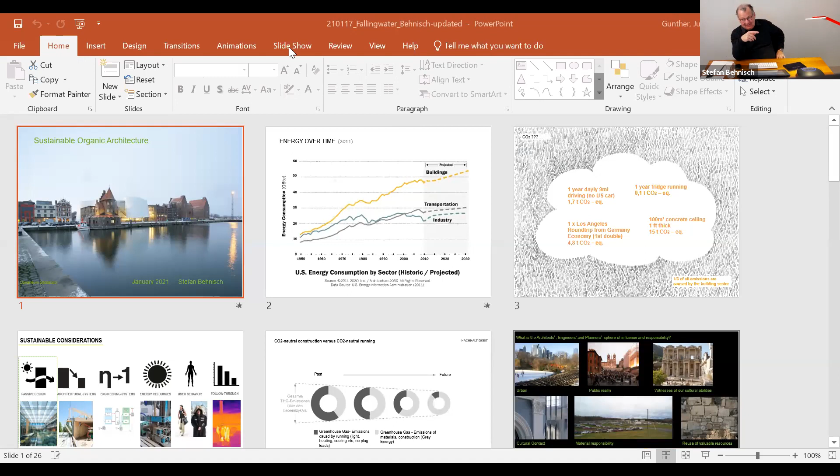I have prepared something. It's not an easy topic for me because the understanding from expressionist architecture here in Europe of organic architecture is a little bit different from the American understanding of organic architecture. But I hope I managed to give some ideas of our mutual understanding here.

I took the liberty to showcase here a non-built building, a building that is right now in design. We just started a few months ago for a well-known client, who asked us to do a CO2 neutral building across its lifespan, including materials and everything—so a real CO2 neutral building. Next, please.

First of all, I would like to remind everybody of the challenges we have here. As we see, our buildings are actually one of the biggest problems we have. Since two-thirds of our building stock is pretty old, it is a challenge for all new buildings to really compensate for that, considering that by 2050 we all want to be CO2 neutral in our cities, and some countries want to achieve that by 2030, which is 10 years from now. Considering that designing and constructing a building takes 5 years, we have to speed up.

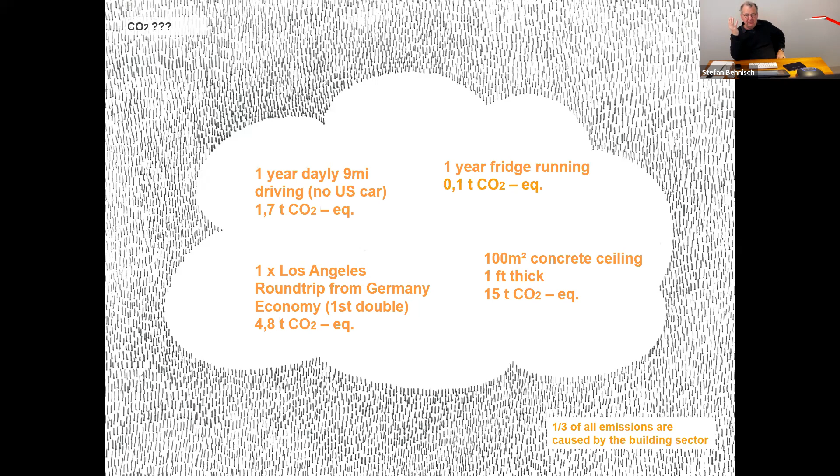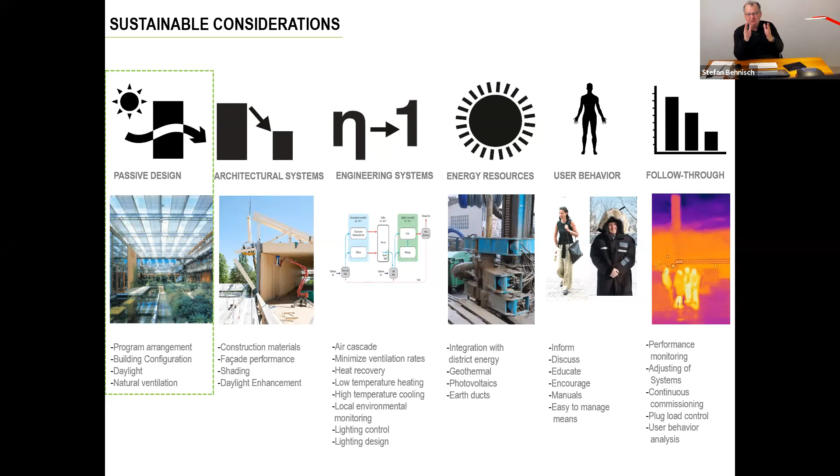Sustainable considerations. We tried in our office to categorize, to find a narrative—how do we approach and explain to our clients what we can do, and how do we approach sustainability. To be very honest, the most important one, which I will focus on today, is passive design. It is the part where, with architecture and design, we have the biggest impact. Only where this fails do we come to engineering systems, energy resources, and so on. Passive design and user behavior are the main influences in sustainable design.

And now comes a very interesting thing. Especially here in Germany, we discuss it right now—today and in the past we all perceive sustainability very quantitatively: kilowatt hours per square meter per year. Considering today's energy mix, it's very important that we minimize the use of energy in a building.

But let's assume we really have all renewable, clean energy. Suddenly this doesn't become the main problem anymore. Suddenly the main problem in buildings is the emissions of materials, the gray energy in buildings—that becomes more of an issue than heating, cooling, or lighting, if we assume CO2 neutral energy. Right now in Germany, renewables reach 80% of electricity demand in summer, and on yearly average we're a little above 40%. So suddenly it's very important how we construct buildings.

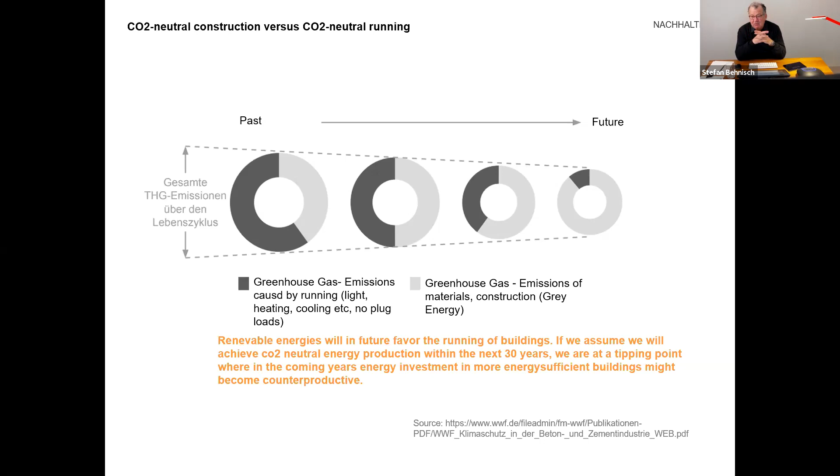So where are the influences when we take a more holistic approach to sustainability, not only a quantitative one? We have the urban context, the public realm, the qualitative aspects. Considering that architecture produces the most prominent human artifacts, they define us—place and time. Think about Paris, New York, Rome, and so on.

Then the cultural context is important—material responsibility, the reuse of valuable resources, the gardens, the green. Only the last three—climate, natural daylight, and artificial lighting—are the quantitative aspects, and these are the ones we totally focus on. All the other ones we tend to forget or ignore. So our focus is too narrow; we have tunnel vision when we discuss sustainability today.

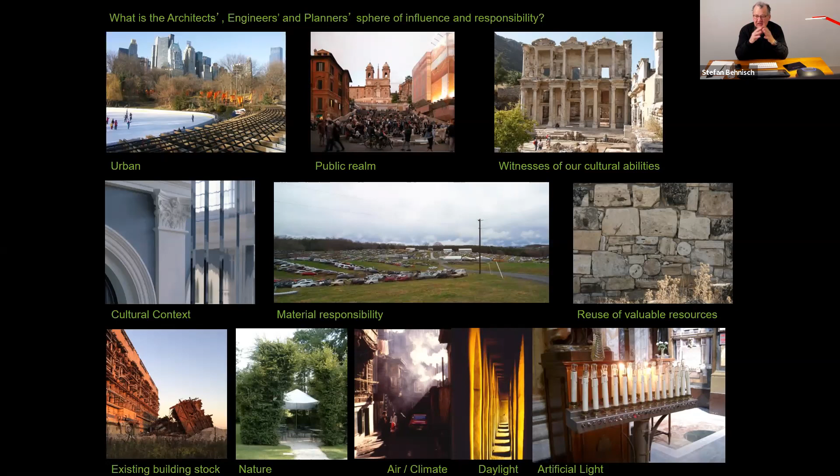And now I would like to show you, on a designed building or a building in the design process, our approach to sustainability. It's supposed to be a CO2 neutral building.

The client said, because it's a school and a community center with sports, kindergarten, and so on—a very multifunctional building—wouldn't it be great if you could see the change of seasons at the building? People have a sweater in winter, a t-shirt in summer, but buildings are all the same summer and winter—sometimes the sun shading goes down, end of story. Wouldn't it be good to develop a building that actually changes its appearance over the seasons, and has different functions?

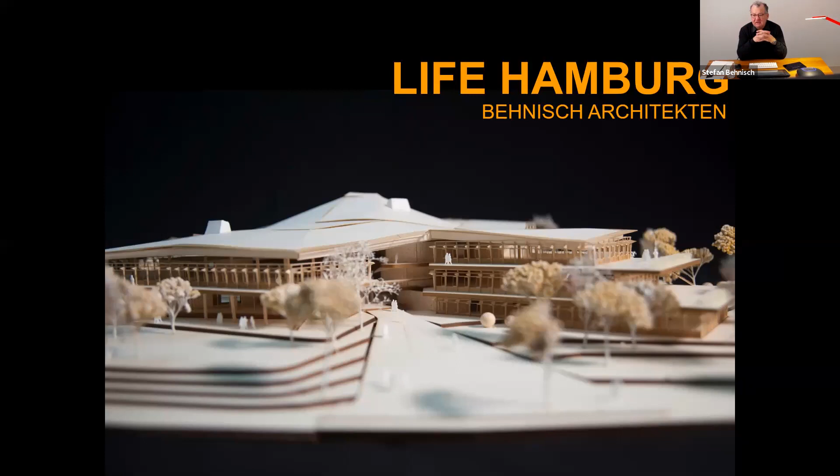Next one, please. And this is the floor plan. We approached it in an additive way—it's almost a little bit back to 80s deconstructivism in its appearance.

Our architectural approach was that each element should fulfill perfectly its own purpose and have the appropriate form, and they come together in the middle. At the outside, they are light—it's all wooden structure. Inside, the rounded elements you see are heavy, made out of clay, rammed earth, so they have thermal qualities. They are activated, with qualities for moisture and humidity in the room. The center is heavy, the outside is wooden and light and reacts. This is how the building functions—the rounded elements are the special rooms.

It's a kitchen, a shop, a cafeteria, a maker space, a music space, a recording studio in different floors—these rounded elements. And what they call the holodecks, the flat elements—the school, the kindergarten, fitness, sports hall—are very open spaces that can be adapted, changed, and so on.

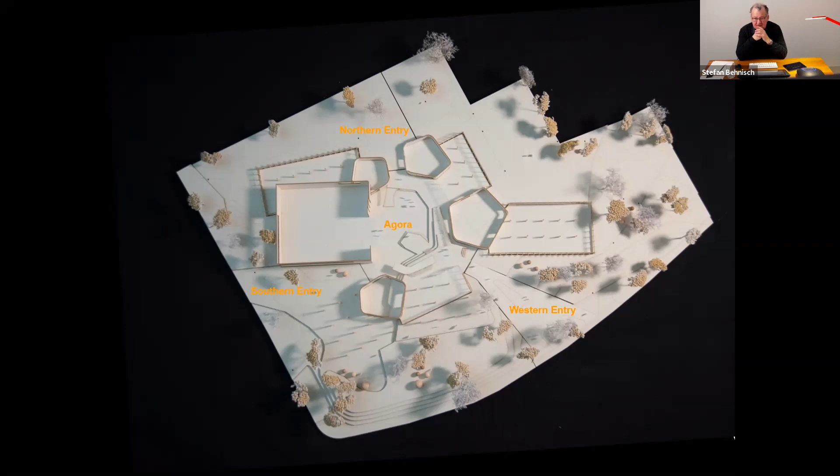So the ground floor is the kindergarten, the cafe, the food spot, sports, maker space, fitness, all this kind of stuff. As you see, it's a very multifunctional building.

In the middle, we have what we call the agora. It's a space where people come together. We have a stage there. We can open the sports hall to it, we can open the multifunctional room—it's in the northeastern corner, between make and food—and we can open all this to the agora.

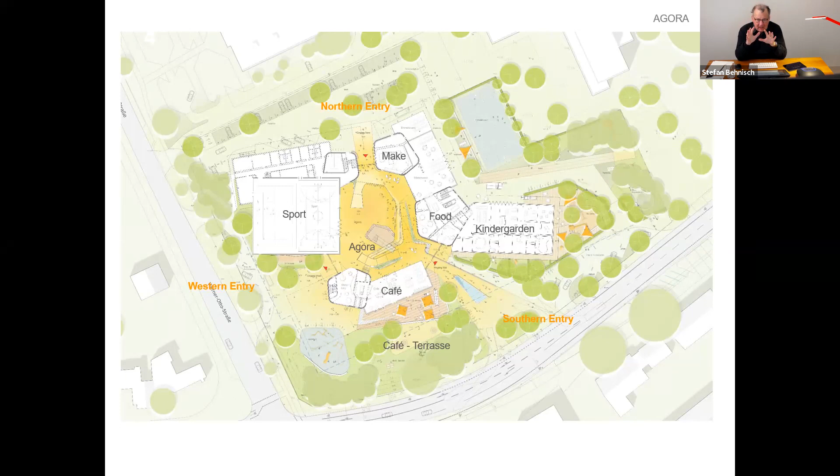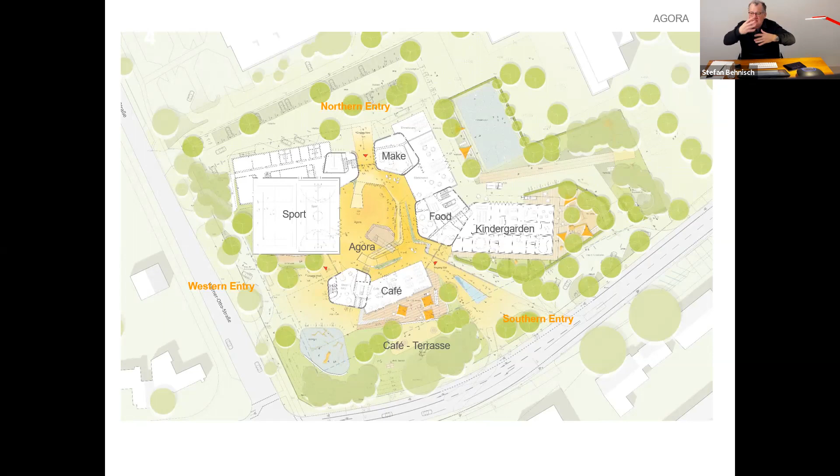One crucial element of the building is that it's inclusive. The client said they want everybody who goes to that school, disabled people or physically challenged people, to reach all elements of the building exactly the same way everybody else reaches them. So the agora is a ramped space—we have a spiral ramp in there, which is also sort of the balcony when you have events, theater, and things like that in the center.

We worked here together with Bartenbach Lichtlabor, Transsolar, and Knippers Helbig Engineering for the facade and wooden structure. Bartenbach gave us the idea that in the north you want warmer materials, matte diffuse materials, softer materials, more earthy, yellowish, brownish; and to the south, exposed to more light, you want shiny, cooler materials and colder colors, to make the space more comfortable and compensate for the different light qualities.

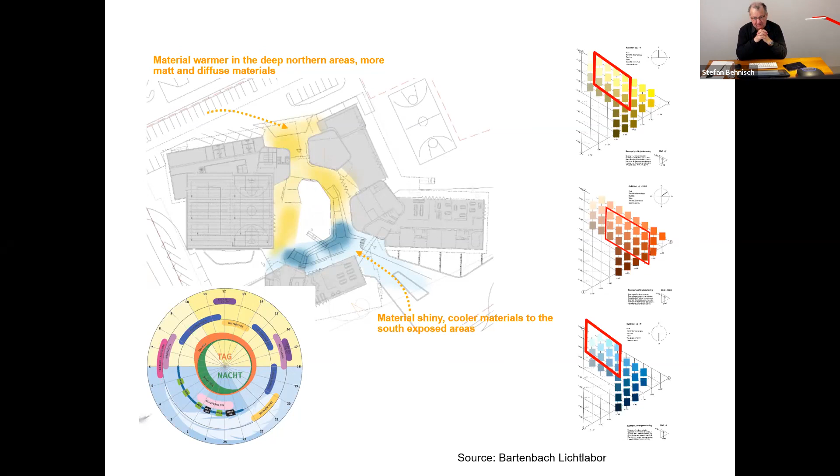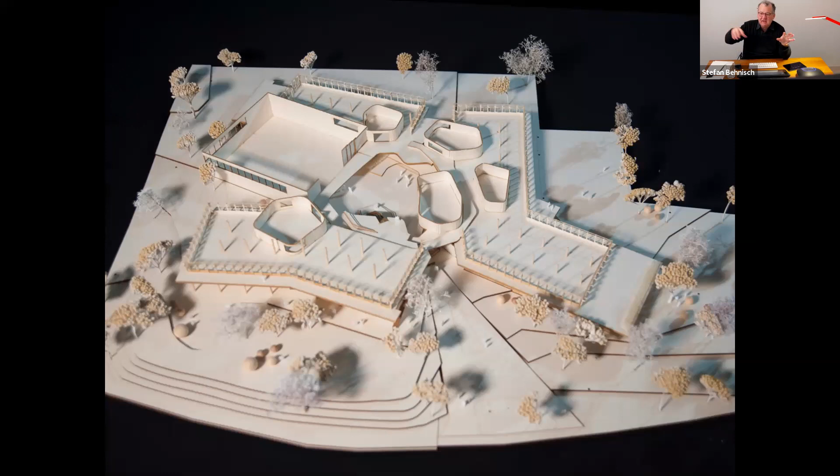Next one, please. Here you see one upper floor. As you see, it's these loft spaces, these very open floor plans that allow these spaces to be used in many different ways. The idea is to have no classroom schools, but schools—a middle school, probably your junior high school—where all children from all grades are in one big room and do project learning in different areas and spaces.

Next one, please. Now we go one floor up to the community hub. It's for the community—music lab, school, health, kindergarten—and they also rent out spaces for startups, so pupils who finish there can rent spaces and create their own startups. It's a philanthropic school; they create this hub for the neighborhood.

Right now we are adding half a floor because they also want a multi-generational meeting space there—elderly people take care of the children in kindergarten, and the children communicate with the elders, or senior citizens. So it's really a very integrated program, which I think is beautiful to have for an experimental project like this.

Here you see a model of the next floor. You see the ramp in the middle, how it goes up. The agora will be the heart, the soul of the whole building, the center where they meet—they all come in the morning, they meet, they have their events there, and then they go to their separate spaces in the building.

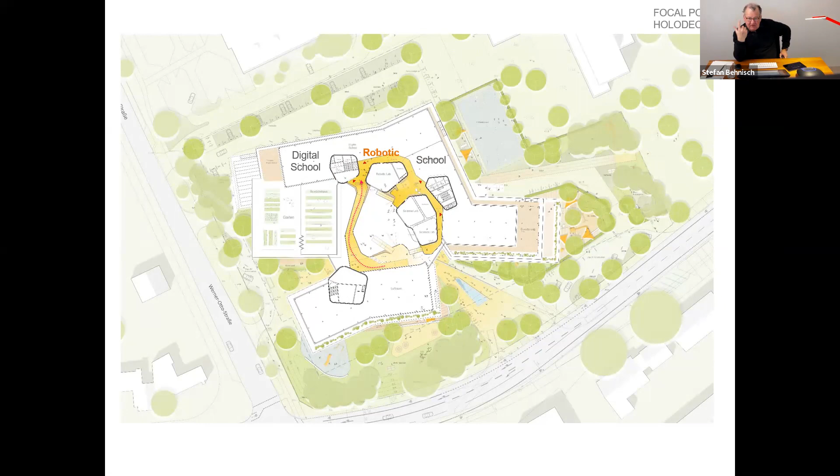They have robotics at the school, the digital school, and they also have startups in there. So it's really a multifaceted program. Next, please.

And here the roof. The roof is an element that ties it all together. It is about 120,000 square feet, so it's not a small building. It's a rather large building.

No basement. We didn't want to use a basement because moving earth is energy and we don't need it here. We have geothermal. Next one, please.

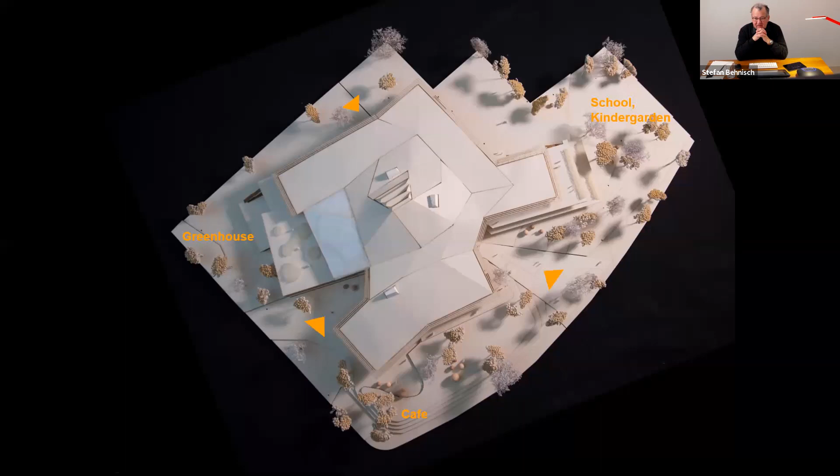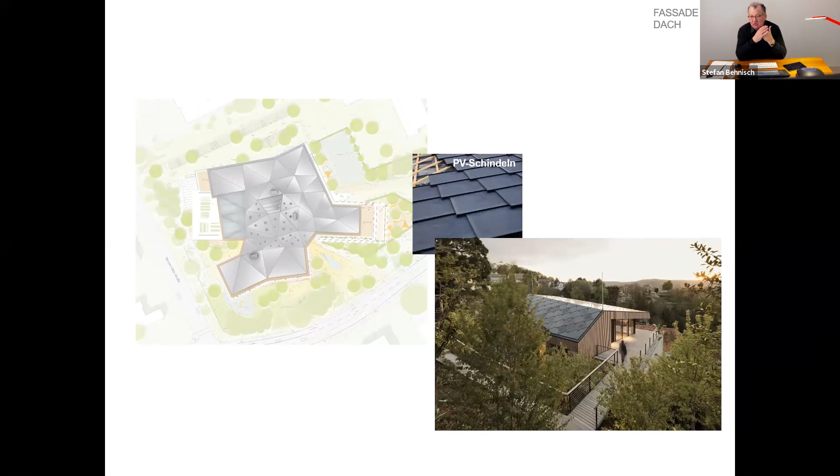I'll explain that. The south-facing roof is photovoltaic shingles. To the right bottom, that's my house, that's where I am right now. The photovoltaic shingles are enough to run the whole building, including all plug loads.

And now comes an interesting part, the facades. We said the facades should be different in all directions. We want to change the facade over the seasons, but we didn't want the lamellas or sun shading going up and down in summer. It should be always open, but well shaded. So we have 4 facade types.

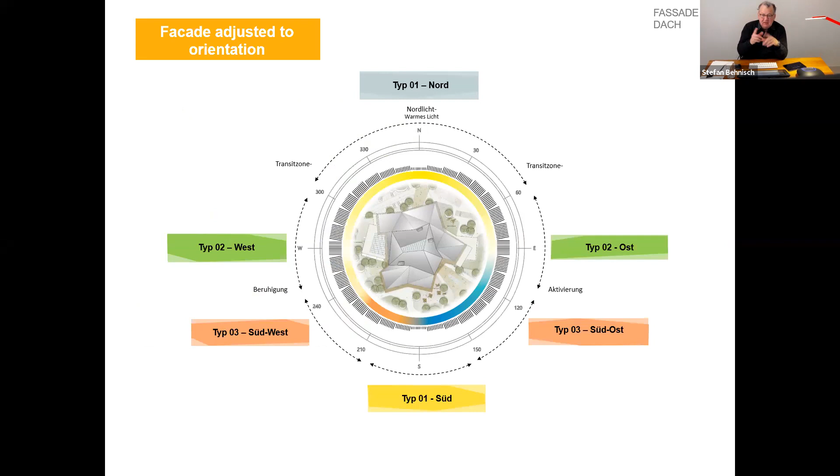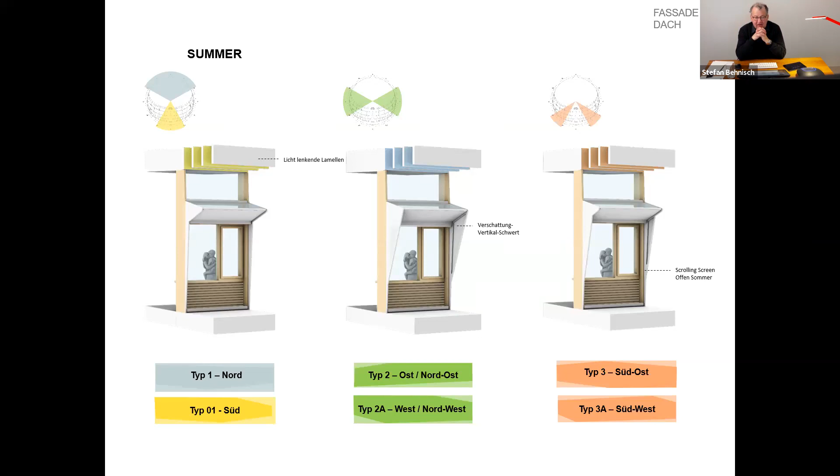Next one. And here they are. It's an all wooden structure with a light shelf on top. The lamellas keep the direct sun out. You see northeast and northwest we have the verticals, and southeast and southwest to block out the sun as it moves. The light shelf and the lamellas block out the sun from above. This is the summer situation, and now the winter situation. Next one.

You hardly see it, but there is a foil, a clear foil, for the time being ETFE, but we are looking for something better. A clear foil over the facade so the insulation value of the facade becomes better. It also works like a Trombe wall, so we can get preheated, solar preheated air into the building.

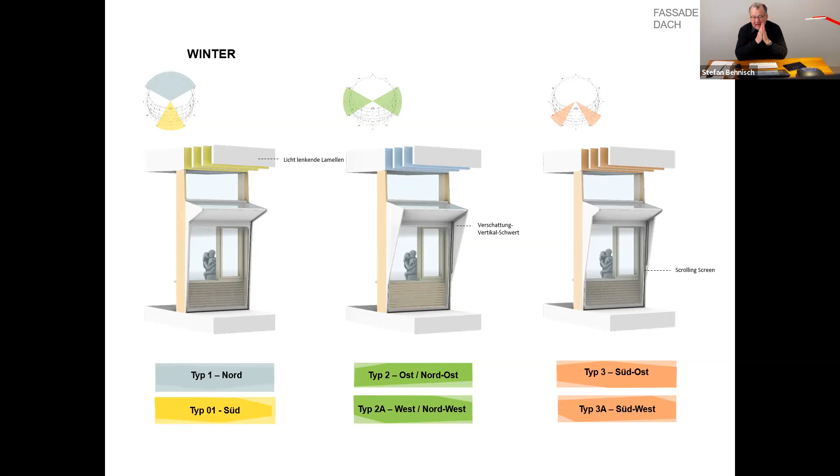It's in the room, we'll show it on the next one. Here you see it. Left, summer, it's open. In winter, the foil goes down. We get preheated air in the spaces in the room. Transsolar did calculations, and on a sunny winter day, that's almost enough to heat the spaces behind it. So we save a lot of heating energy, and all the rest is provided by geothermal.

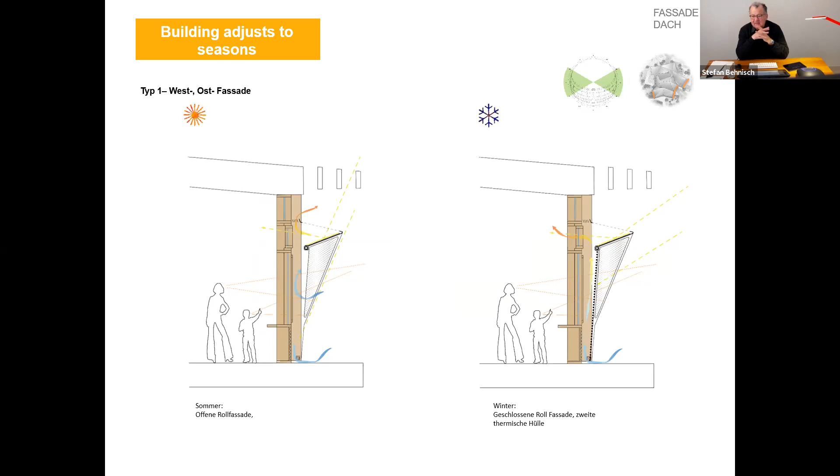Cooling is only geothermal. It's Hamburg, we don't need much cooling. But cooling is only provided by free flow geothermal without a heat pump. And in winter, we need some heat pump. Next one.

And here is the concept. It's a mostly passive concept. So it's natural ventilation, an earth duct, geothermal, and we work with the lee and luff of the wind to have natural ventilation. We have a big greenhouse on the roof to bring preheated air into the building in winter, and pre-cooled air in summer. The agora is generally the breathing apparatus, it's the air return of the whole building.

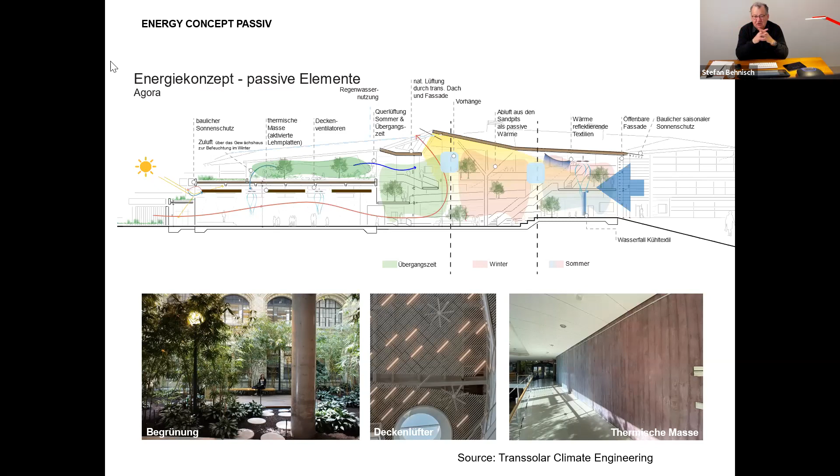Next one, please. And here, what you see at the bottom is actually quite interesting. It is a precast clay plate with tubes running through, and then it's plastered over. So you have an activated ceiling or walls, pure clay, giving a very good humidity situation, but activated.

And to the right, we are right now experimenting with textile heating, a special textile where you get warm water through. You can use it like curtains and things, it's a fabric, and that helps with heating and also works acoustically. So there is no tubing in the floor, only the tubing in the active clay ceilings, and the rest is curtains for additional heating in winter.

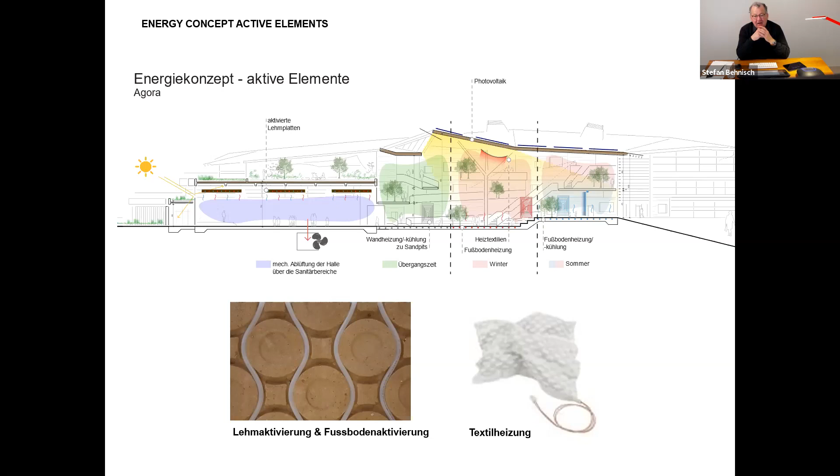Next one, please. The wooden structure, Knippers Helbig did a calculation. Right now there is a new wooden system developed by the University of Rosenheim, which is almost like a concrete ceiling. To the right, it has a steel head on top, and you can have a flat CLT wooden ceiling without any beams. The dimensions are not thicker than any concrete ceiling, just the column is a little thicker for pure fire protection, that's the only reason. But the ceiling itself is not thicker than concrete.

And when you look at the numbers, with concrete we have 1,000 tons of CO2 emission for the building. With wood, we get a credit of 1,000 tons for the building. But once the building gets demolished and the wood gets burned or not reused, we lose the credit again, so it's more or less zero. We have to look into preparing it and so on. But generally, we have an advantage of 1,000 tons of CO2 when we go to wood instead of concrete. Next one, please.

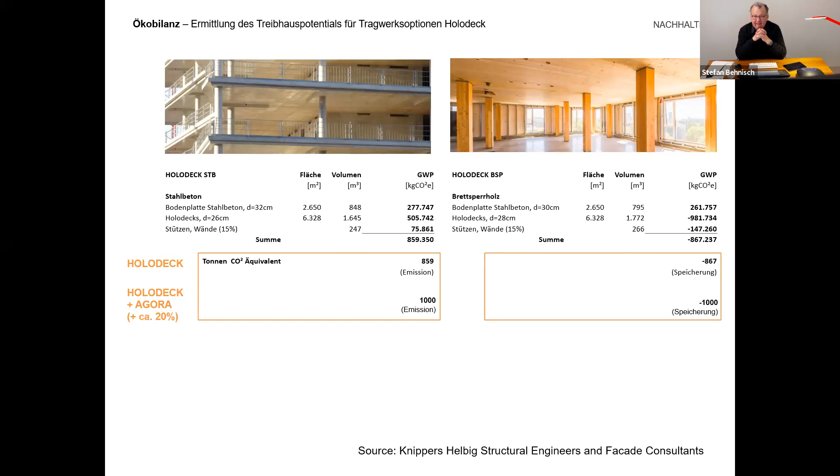Thank you very much for your time. I hope I was able to explain a little bit our approach here.

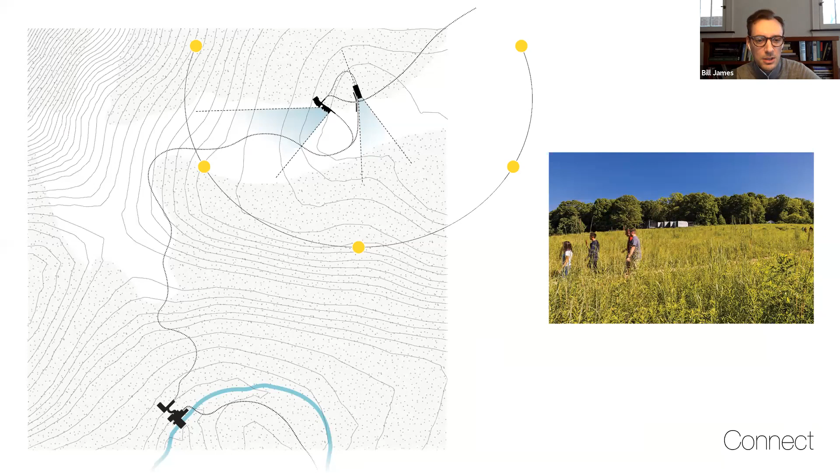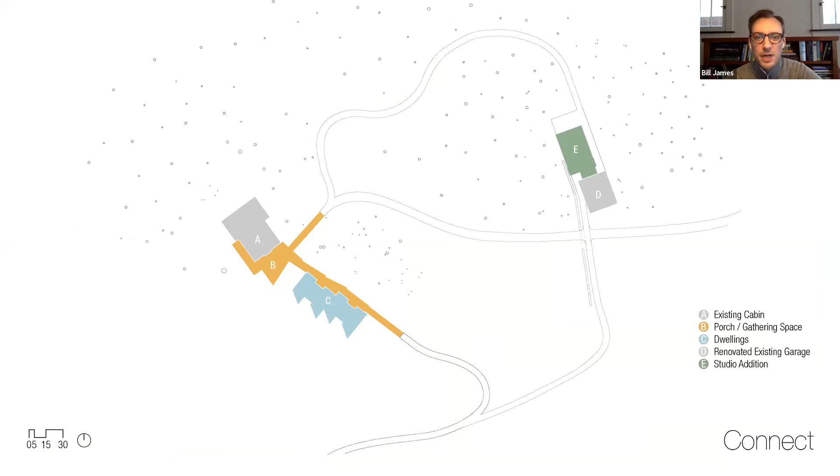At a smaller scale, the complex works as an interconnected organism that provides places for exploration, study, work, solitude, and gathering. Weaving together connections to the land and between its residents, the project strives to foster a respect and sensitivity to the natural world. High Meadow looked to conserve the resources already present on site, leveraging an existing detached garage and split-level cabin to anchor the studio and dwelling programs, respectively. Tired and well-worn, these existing structures were given new life, made more accessible, and their envelopes bolstered.

Inviting people into the High Meadow dwellings is the humble gesture of a sloped wooden deck that draws up from the forest floor and welcomes people to inhabit the main level of the existing cabin and the new screened porch and sleeping units.

Raised on a nimble network of columns, the natural patterns of hydrology on the site were maintained, so rain is able to freely flow under the new construction. It also provides a privileged perch for the inhabitants to experience the natural world while fostering a sensitivity to the land and how we touch it.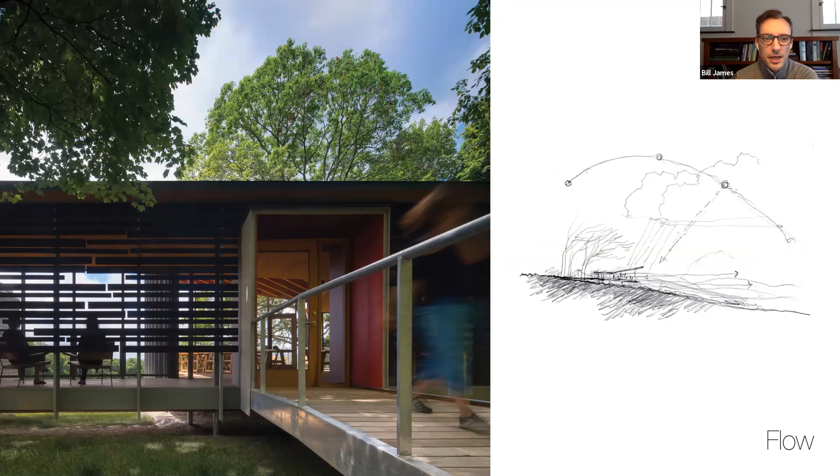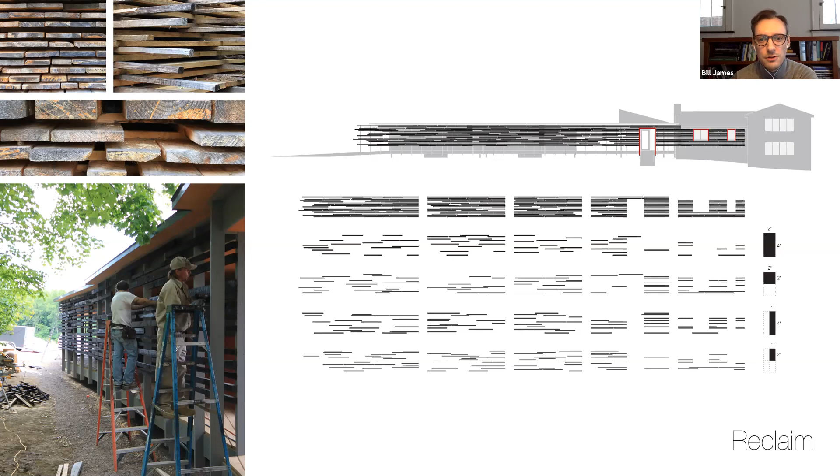A wood screen wall weaves together the old and new elements of the building. The tapestry is constructed of non-native trees harvested and milled on site. Through selective cuts, the rough sawn boards were divided into four profiles, providing rich variegation through an efficiency of means and stewardship of material.

Starting as a dense weft and slowly fraying into the meadow, the slats provide a variegation of light, color, and texture, serving as an extension of the forest edge, drawing you to the meadow while providing you with curated views back to the wooded understory.

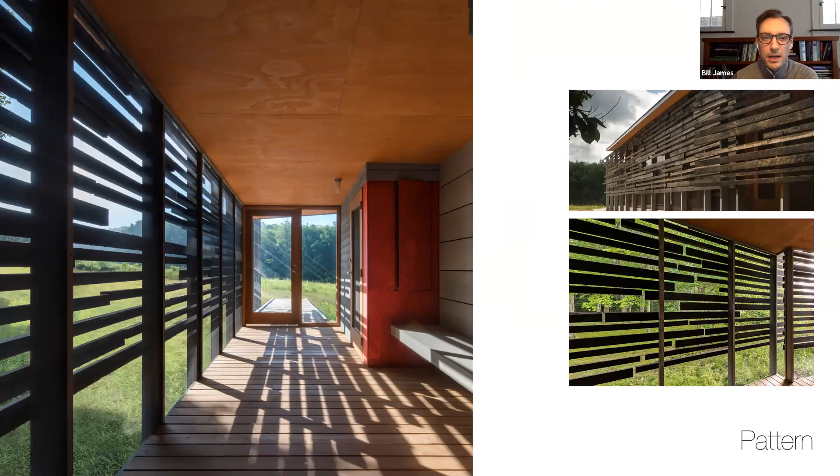An intimate place to sleep and study, a meandering walkway with places to sit and draw, an airy screened porch to gather and eat - knowing the pattern, movement, and proclivities of people, and creating places to connect them to their natural surroundings at a range of scales makes for rich community.

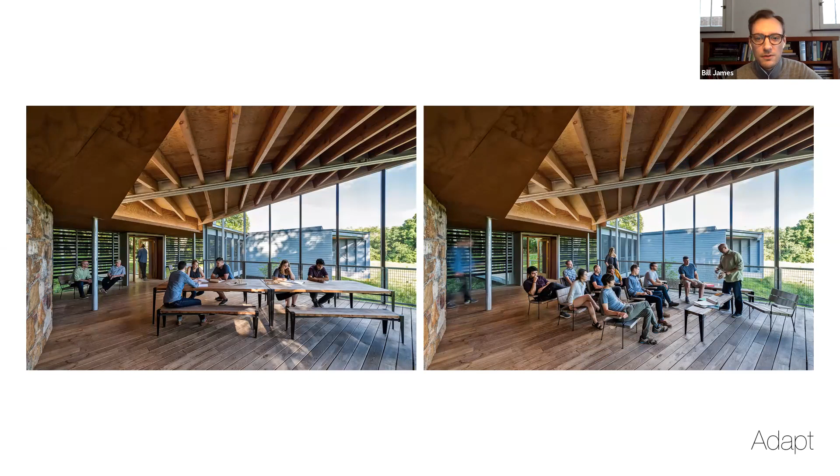Simple and open, the adaptability of the central screened porch allows it to serve as a place for dining, lectures, critiques, and talking into the evening. This space is unconditioned, like most of the facility, and it reduces the size of mechanical systems and energy demands while availing it to the breezes, smells, sounds of the meadow and forest.

Things that are sustainable endure. They last, not just for this generation, but for generations to come. Selecting a simple palette of modest but resilient materials helps to ensure the long-term sustainability of this place and the important programming that it houses.

Articulated angle shrouds at each sleeping unit help capture cool breezes coming up from the valley floor while shielding those within from the summer sun. Responsive to the needs of people, the shrouds also help to frame views and provide privacy for those personal spaces.

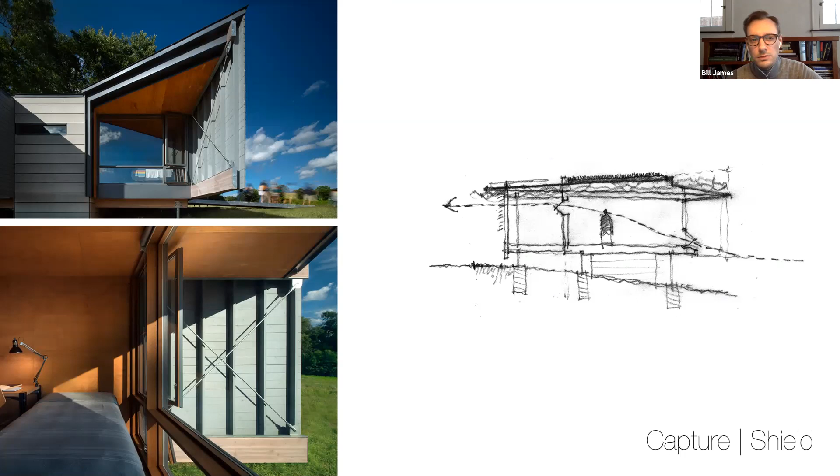In the studio, as in the dwellings, the work is always seeking to orient and raise awareness of the inhabitant to the world around them. The shop area frames a duplex of views to the small orchard and forest beyond. Shaping and milling wood here is done with the raw resources quietly on display.

Minimizing the need for artificial lighting, the studio uses simple polycarbonate panels to wash sunlight in from above, allowing students to connect to the seasonal colors around them, attuned to the rhythm of the seasons in southwestern Pennsylvania.

The studio is nestled into the woods, ever cognizant of its need to coexist within the delicate ecosystem it inhabits, while humbly providing shelter. We are committed to creating places like High Meadow that invoke purpose. Well-loved places are well cared for, and well cared for places endure the rigors of time.

As students work into the night, the studio glows as a lantern, guiding those coming and going through the dark forest. But our buildings must also guide figuratively, setting standards for sustainable practice and guiding the next generation to greater levels of stewardship as they live, work, learn, and grow within our built environment.

We do so by being alive to the organic patterns or natures of people, places, and the ways we make things. It will lead us to greater sustainability, but it will also provide us with the opportunity to make a richer, more powerful, and evocative architecture.

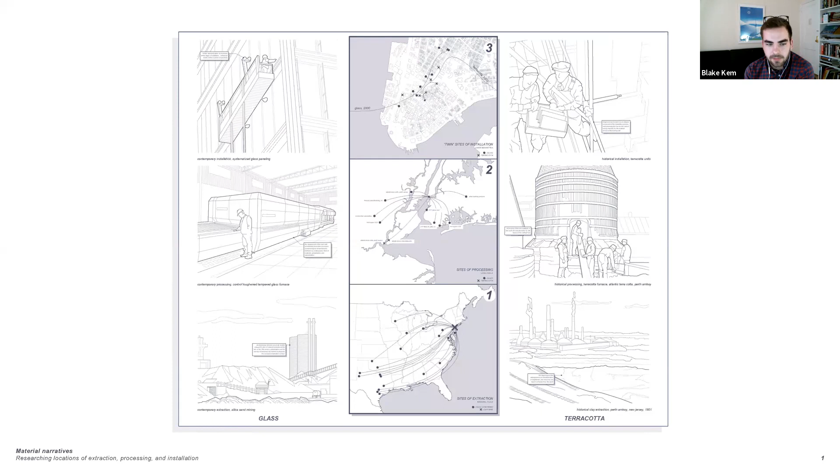One of the most important and often overlooked threads of contemporary sustainable design originates from research showing that around 80% of energy associated with building today is directly linked to the sourcing and maintenance of building materials: extraction, transportation, processing, production, demolition, disposal—what architects like to call a building's embodied energy. The last 20% is reserved for a building's operational energy.

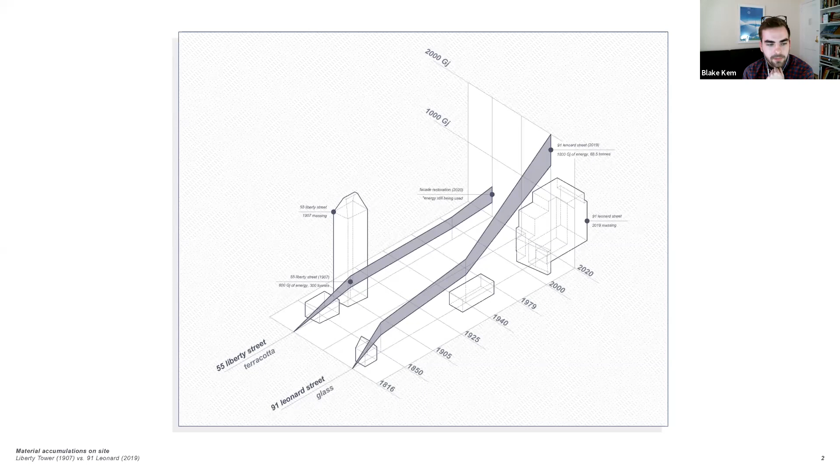With this in mind, the research for this project followed the material story of terracotta at a selected site in the financial district of Lower Manhattan. The site being the 1907 Gothic high-rise skyscraper Liberty Tower, an important antecedent to the famous Woolworth building, built just years later. The research was furthered by questioning the ethics of modern building culture, specifically the ways architecture can be seen as endless accumulations of embodied energy material on a singular site over time, which began to reposition existing materials as wonderful opportunities for reuse, attempting to solve our contemporary energy sourcing issues.

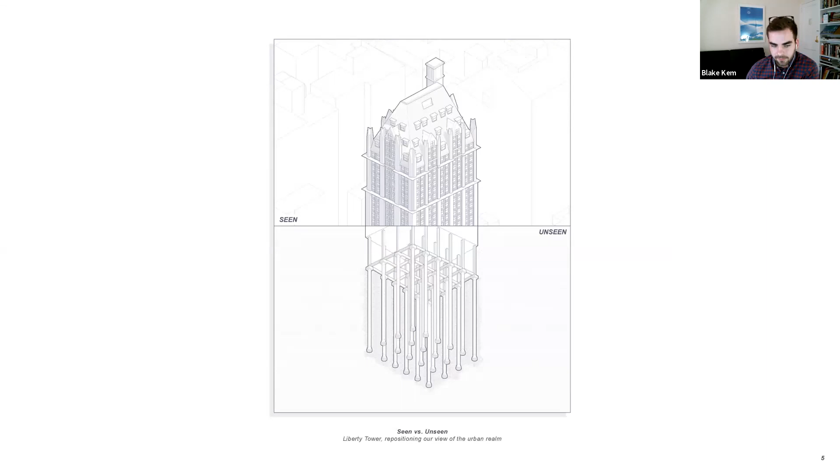Drawing is here represented in these images as a first step towards understanding the complex effects, flows, and feedback loops of the project.

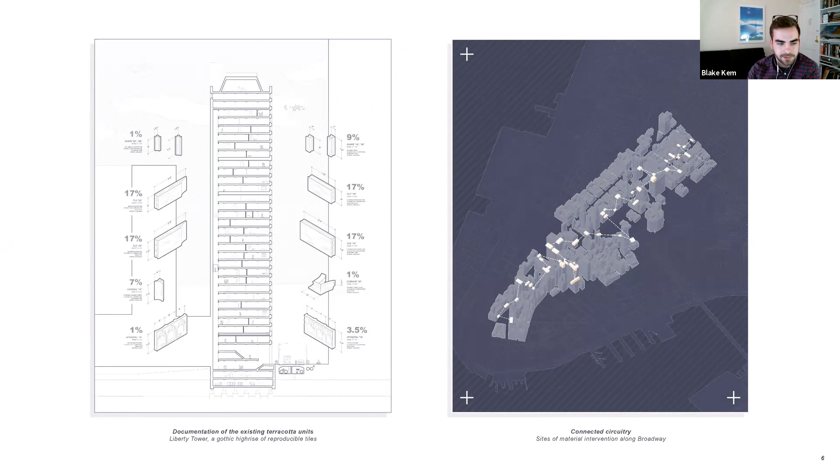The analysis ended in cataloging Liberty Tower's terracotta cladding components from the most reproducible to the most unique pieces, as you can see on the left, precipitating one of the defining critiques and questions of the project: could we be more expressive with a material that allows for so much flexibility and sculptural quality? Speak more honestly to the kind of inherent qualities of the material.

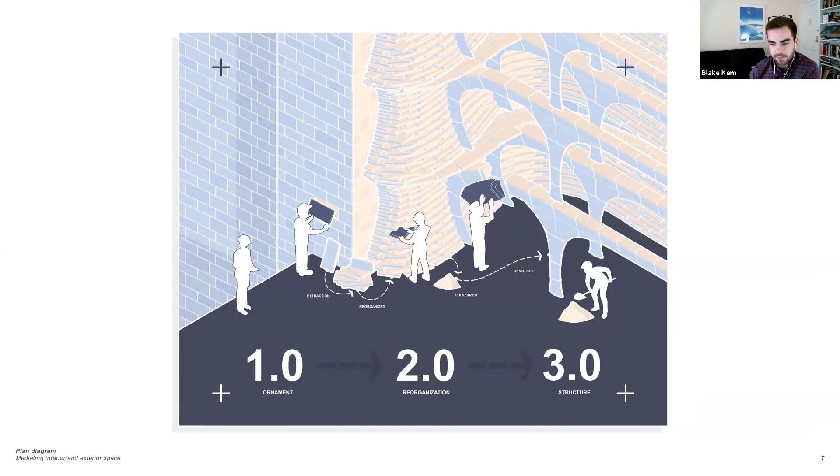From the beginning, the project always desired to be defined by a process relating back to this material story, the material process, and by a series of material developments which allowed the energy embedded in the material to be recycled and reused to create a new architectural intervention. It sets a precedent for future sustainable design in the city.

Terracotta from the building's exterior is removed, rotated, and stacked into a much more dynamic poche on the building's interior. Then the last stage, as you saw in the previous image, on the building's exterior, quantifies a structural form which speaks most honestly and clearly to the ability of terracotta to be recasted and molded.

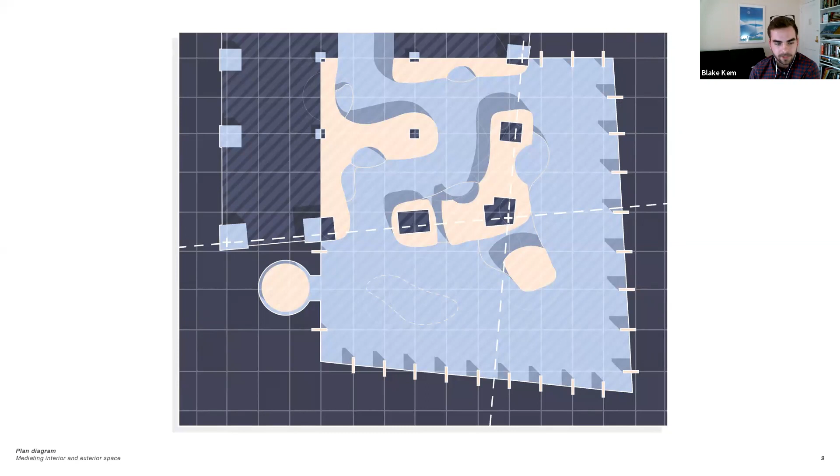Realizing the diagram, the plan, and program of this concept was first analyzed in color block form, exploring the mediation between interior and exterior space, seeking to envision a synergy yet distinction amongst the layers of the urban fabric. The program for the building becomes a holistic response to our soon-to-be post-COVID environment.

Attached directly to the building, the proposed Center for Civil Discourse, its construction and ownership formulated by 3 local debate and discourse organizations, reinforces and incentivizes at every corner the social and human love for informal interactions.

The first floor primarily becomes a service floor for the intervention, housing the dining area, the cafe, and the storage functions of the center, while the second and third floors are much more flexible and represent the primary programming of the building, with large and small lecture halls wrapping around the exterior, complemented by intimate, informal meeting spaces and the darker cave-like poche.

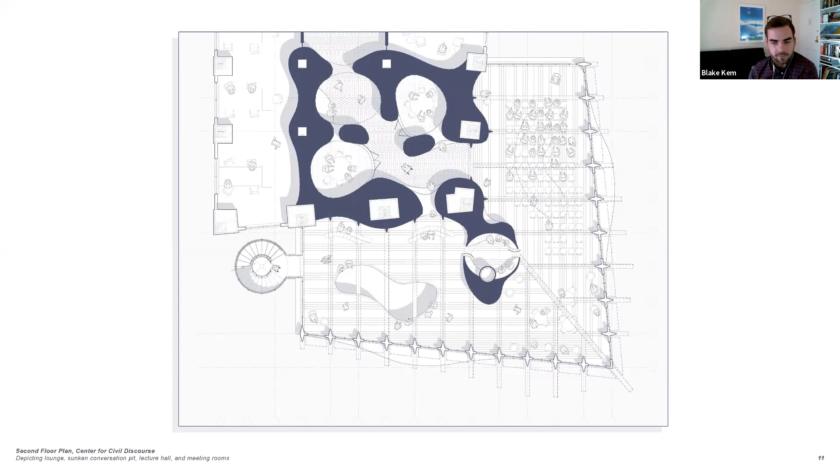These spaces are supposed to facilitate the lost social encounters that were taken from us or eradicated from our lives when the pandemic struck the earth.

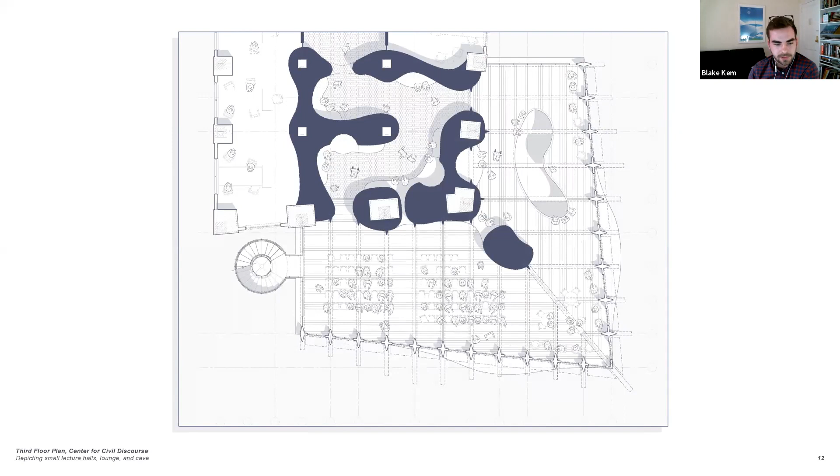From a more holistic vision, the different interventions throughout the city are imagined as a sort of connected circuitry, as you can see in the section to the right, that reclaim the vacant offices and apartments from the pandemic and return them to public programs for the betterment of the collective's experience of Broadway, to kind of break down the barriers that we see vertically throughout the city.

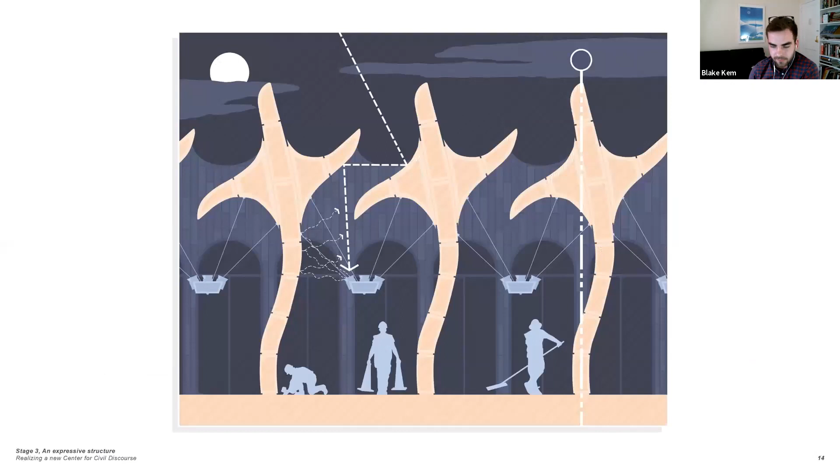The expressive structure of the exterior spaces provides ample room and programming for business lunches, shared office spaces, and informal meetings during the weekday, while formal lectures and scheduled meetings are imagined in these spaces during weeknights and weekends. You can imagine this as a wholly inclusive space for local residents and local organizations.

Lecture overflows, unexpected encounters, and meetings after the meeting occur into those organic interior spaces that wrap around the formal program spaces.

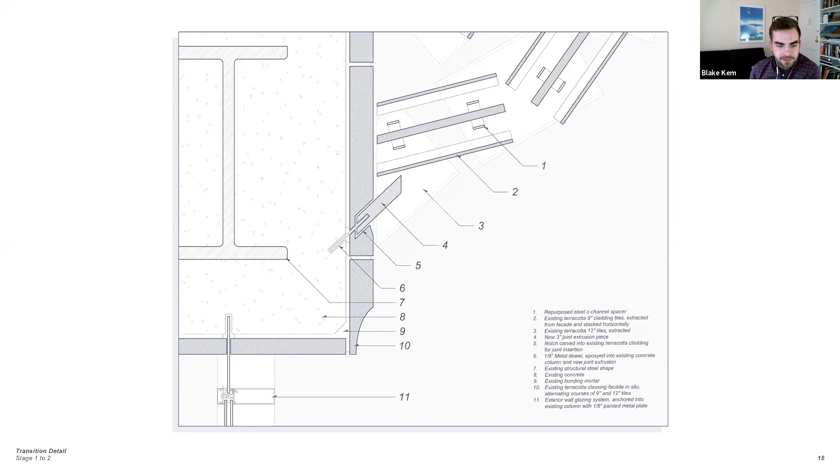Of course, in the spirit of Wright, the connections become a crucial design challenge and a moment to explore the transition between these different stages I've laid out between terracotta's reuse and its recasting, distinguishing them as the disparate stages of development and showing how embodied energy is being reused in the process.

The series of details explicates the physical transition done by the space owners, the organizations themselves, from flat cladding removed from the building area where the intervention occurs and rotated to form the much more expressive, ephemeral, and organic poche on the building's interior. This is stages 1 to 2.

The second transition from stages 2 to 3 proclaims a much more expressive and honest detailing of terracotta, with the inherent qualities of the material becoming expressed in the building's sweeping arches of its formal spaces.

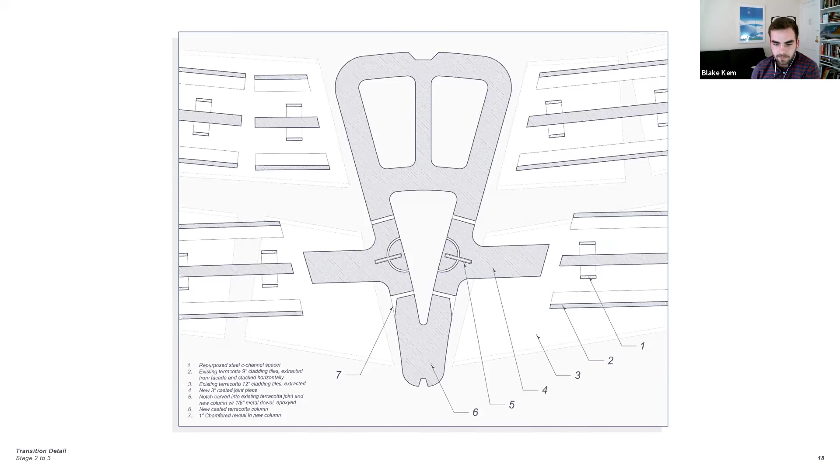The realization of these moments is particularly important for the owners who will be working in conjunction with local craftspeople and designers, terracotta producers and suppliers, to explore the unexpected and informal possibilities as a method of community building and placemaking.

Once again, and maybe most importantly, the craft and design, molding, and assembly is expressed in this ephemeral state of architecture and assists in situating the fundamental elements of organic architecture within the purview of sustainable design.

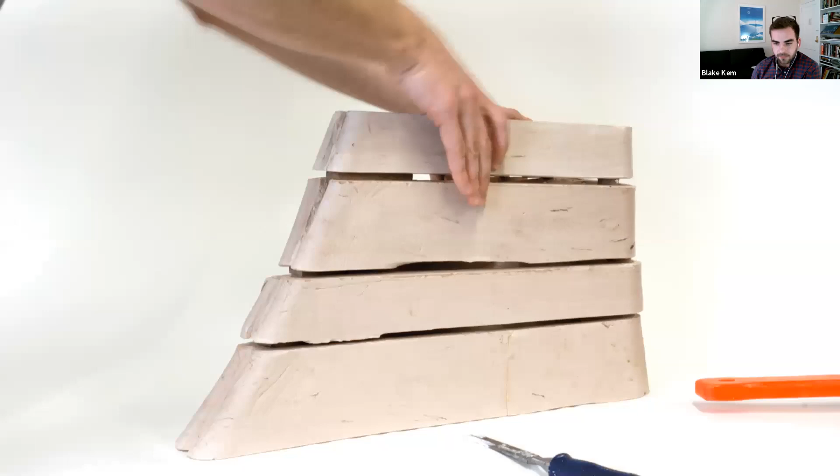That's all, thank you. Thank you, Blake. Well, such a fantastic presentation, a great range from embodied energy to the art of joinings. I really appreciate the passion. Wonderful project, thank you so much.

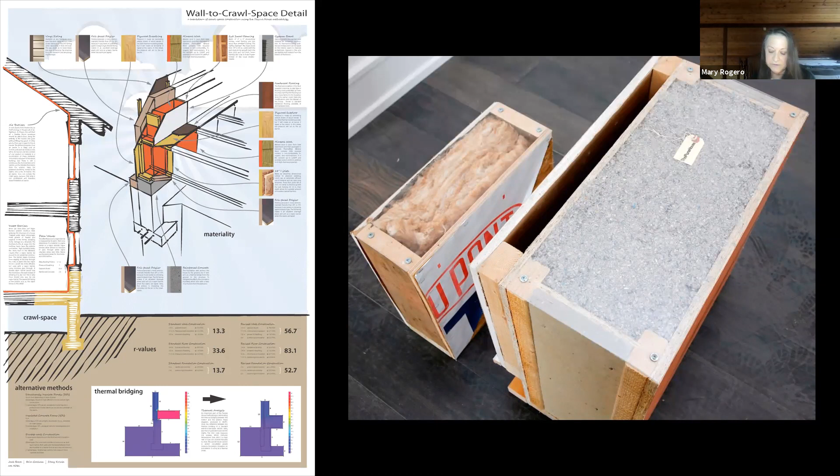Passive building is different than passive solar. It's about optimizing the building envelope in order to reduce the energy we need to produce thermal comfort. By having a better performing envelope through air tightness and insulation, we can reduce the size of the mechanical system, and thus internal gains and moisture have much greater impact on our heating and cooling system and the viability of the structure itself.

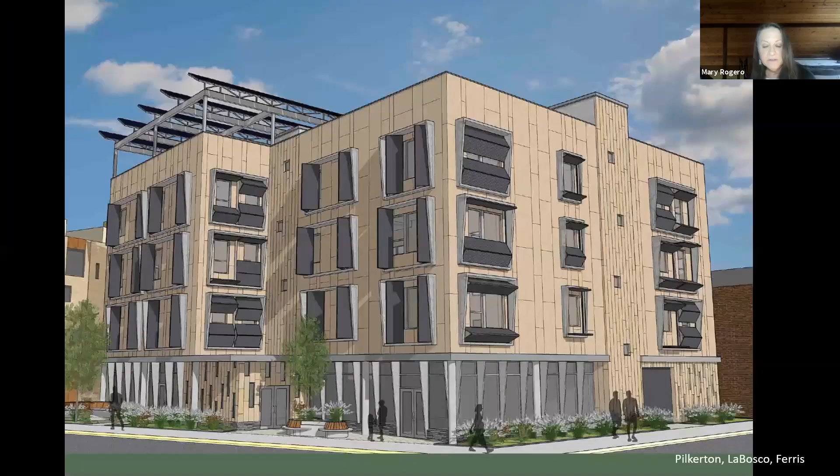We teach this through a variety of different formats. John mentioned the CPHC certification program, but we also teach studio using these methodologies. This is a commercial project developed by our students for a social service agency. I think this methodology is an effective solution for housing and commercial projects, but particularly effective for multifamily housing, and is being adopted by many affordable housing agencies across the US.

Energy security and affordability for low-income housing is an important factor for the social justice implications of sustainability. The work we do in Passive House has helped support our student teams, who for the past 4 years have participated in the Department of Energy Race to Zero and have had great success.

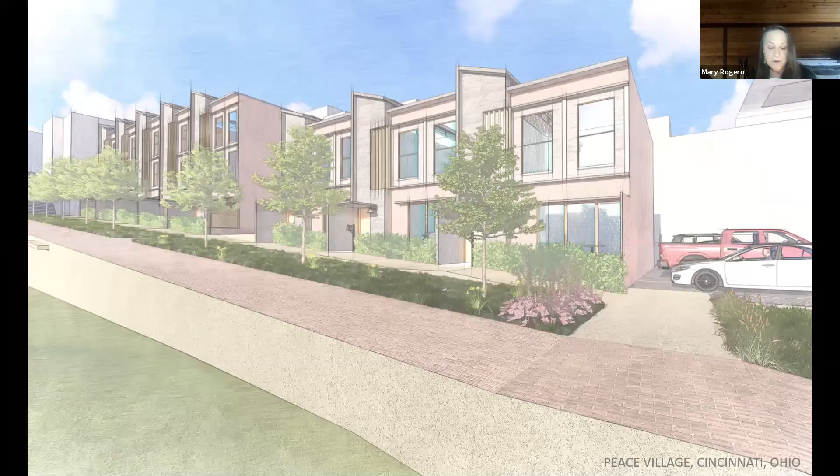That work does not happen by me alone. It's a team of people, including John Becker as the main studio instructor for the last 2 years, Mary Ben Bonham, and many support staff and a host of industry partners.

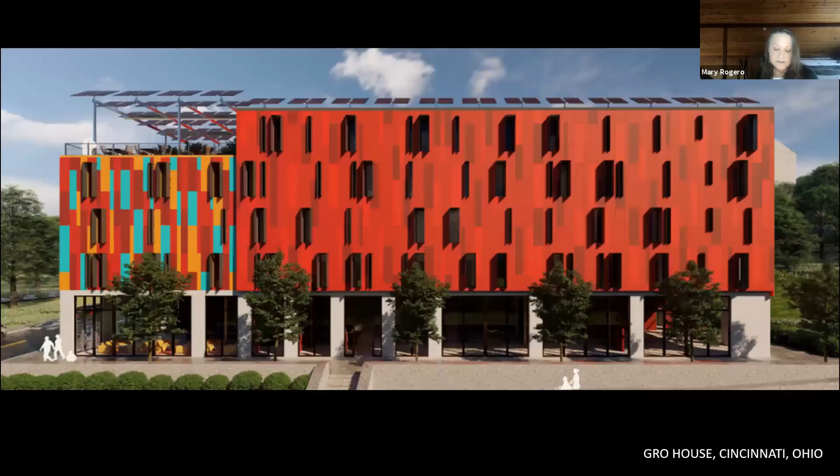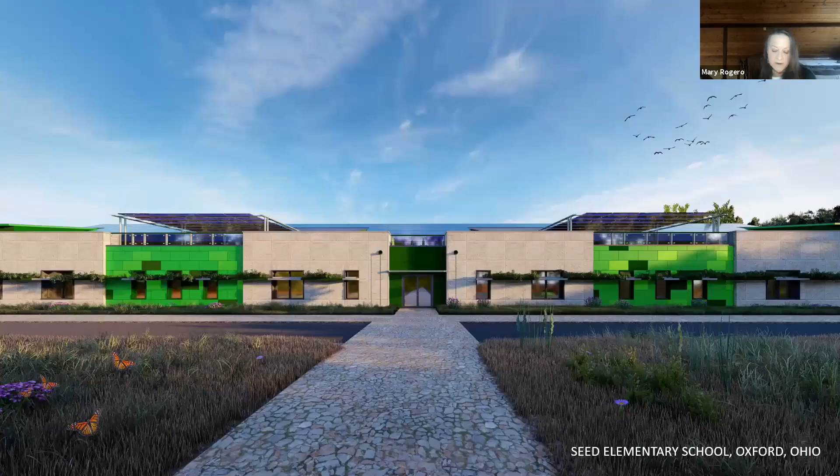Our 2020 grand prize project was a net zero affordable housing development called Peace Village in the Over-the-Rhine neighborhood of Cincinnati, Ohio, an area that experienced widespread gentrification resulting in increased homelessness and the forced exodus of long-term community residents. The project also included a small multifamily team that created the Net Zero GRO, or Greater Residential Opportunity for Wellbeing, a 47 unit mixed-use housing project with ground floor public laundry and community spaces where education and support could be provided to residents. Both were done in partnership with the Over-the-Rhine Community Housing Agency.

Our 2019 competition entry also combined 2 projects on adjacent sites: an elementary school, Sowing Seeds Academy, and an affordable, attached affordable housing project.

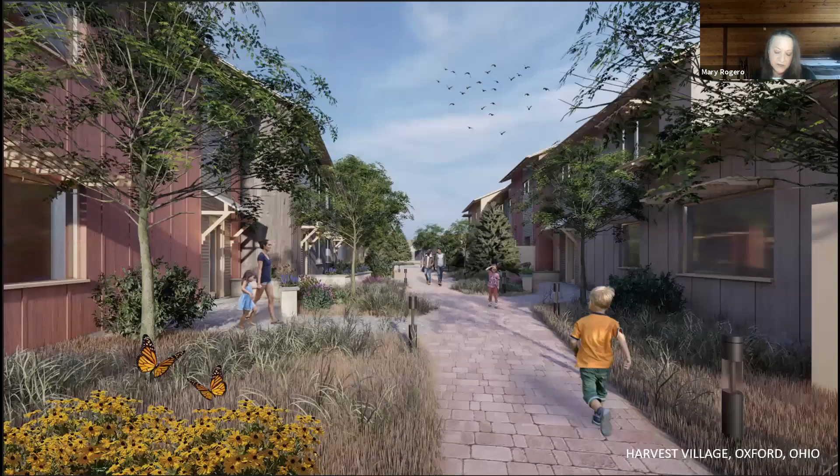Between these two net zero projects was a pollinator prairie that provided both an education opportunity for the school and a passive recreation space for the residents. Here we see one of the images of the attached housing, which Blake Kim was actually a part of. It creates these larger scale projects, a really good opportunity for us to deal with the site in terms of regenerative processes and looking at biological solutions for water and water runoff.

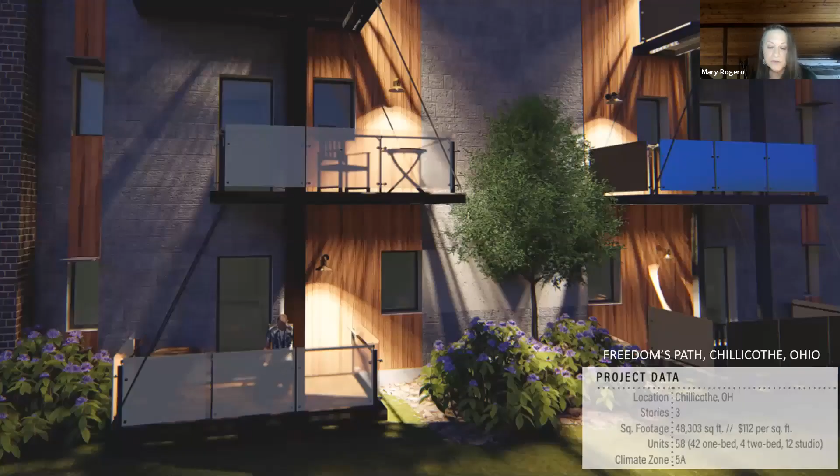Our 2018 project was a small multifamily housing project that provided much needed veteran housing in Chillicothe, Ohio, also providing social and rehabilitation spaces for residents.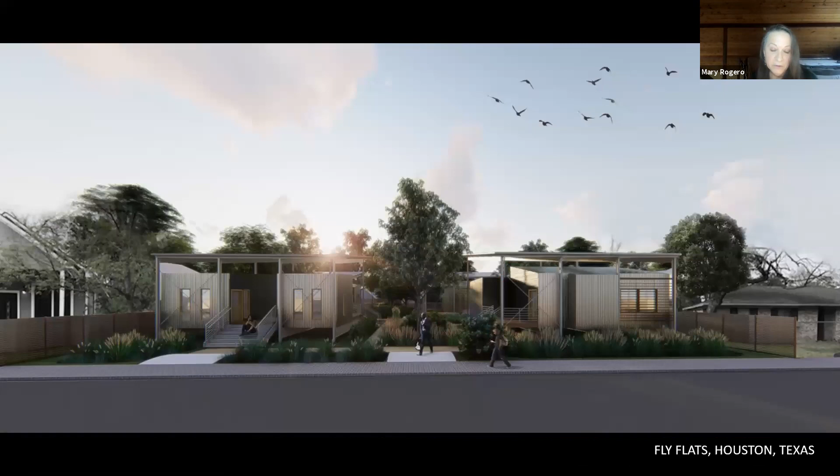Also, numerous award winner Shelley Potter from Prairie View Texas A&M, who started first teaching the CPH curriculum, and whose team won the grand prize in the Solar Decathlon in 2018. This won an AIA COTE Award, and Shelley's getting ready to start production on their first fly flat house.

Lastly, I want to share a project of mine in Oxford, Ohio that my clients have graciously allowed me to use as a regular demonstration house for my students. The students can always tell the quality of the air on the inside, how fresh it is, and how comfortable it is. I really enjoy that the client, during the wintertime, always sends me emails telling me he still hasn't turned on the heater yet.

So the air feels so fresh inside, and the views and the landscape, just an incredible space to be, especially when he's locked in during coronavirus.

I want to leave you with one final image of the entryway to the Schreider house, where the owner had his sons produce a modern day version of preserving their child's handprints on the panel before the corten had oxidized. Whenever I see this image, I'm not only struck by its tender and poetic presence, it reminds me that as designers and as humans, it's important to understand that we leave our mark on the world, and how we leave our mark on the world. Thank you.

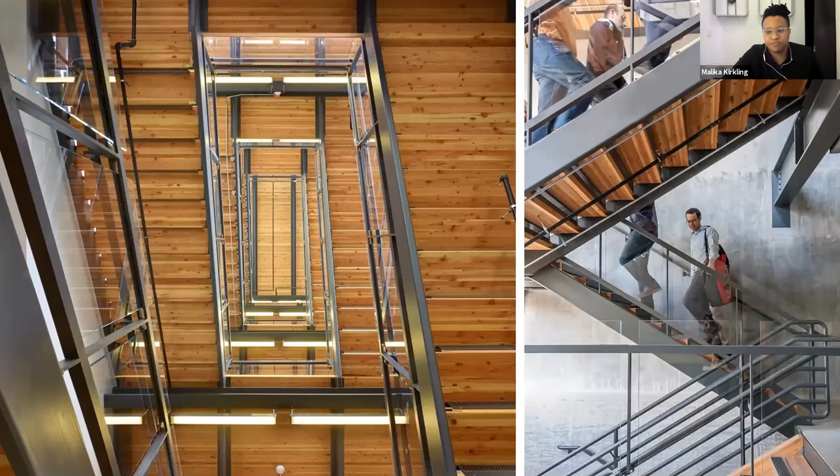Then we can appreciate with quiet clarity the prominent protrusion of the Bullitt Center's irresistible stair, enticing us to comfortably climb and to conserve the energy often devoted to non-essential trips in an elevator.

And in this simple functional act, we complete the essential purpose of the detail, to encourage mindful behavior and to be rewarded for our efforts along the way, to create and support regenerative systems and become a human component of the detail and system.

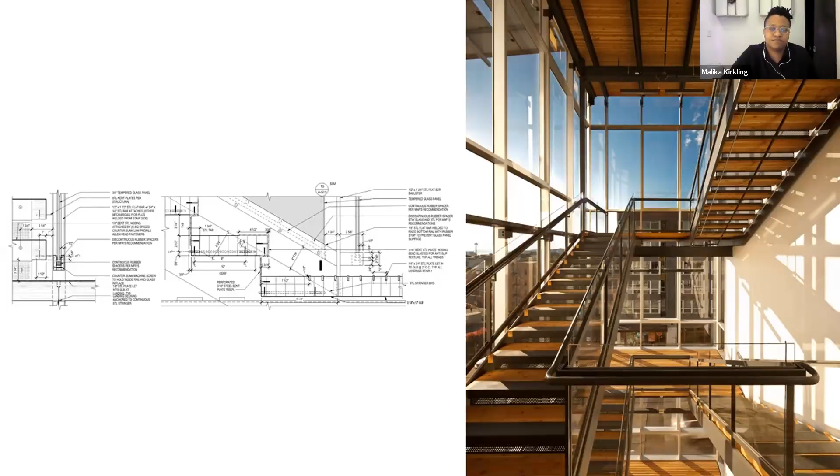Ultimately, it could be said that it's simply a stair. Its performance and articulation is familiar and not complex, but we hope there is beauty, purpose, and a signature that resonates in its nuance.

At times, the idea of one in detailing is manifest in an unexpected series of repeating scales, which echo programmatic, visual, and conceptual relationships, creating and reinforcing a broader, iconic concept of detailing.

At Fisherman's Terminal, the intersection of Seattle's tech economy and its fisheries and maritime industrial belt creates an opportunity for the integration and articulation of form and function, reflective of both the history and promise of these hybrid industries.

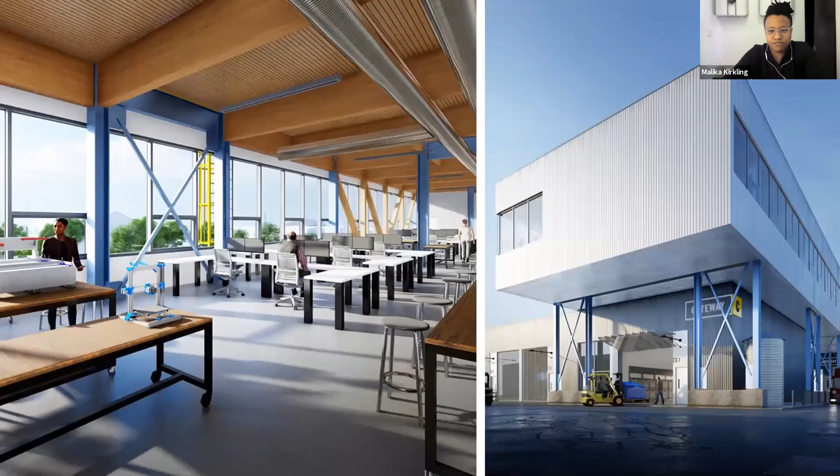A tech incubator gantry over multiple industrial warehouses distributes at their intersections the shared infrastructure of both environmental and human-based systems, both a visual concept and actual organizing principle that reflects a newly envisioned industrial working order and future for the port.

Within the context of organicism and the LBC, the critical detail has the power to provoke our preconceptions about what even constitutes a detail. What is planned, articulated, constructed? Can you truly detail the organic?

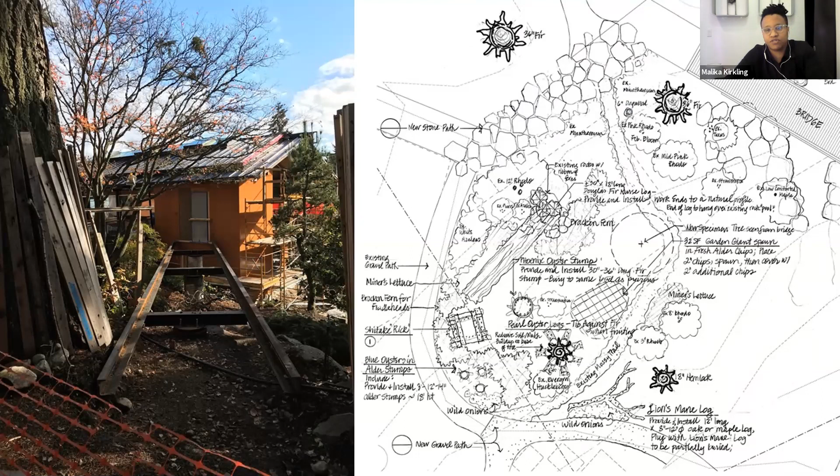What life can a detail have beyond its construction? Or what life can it literally provide? A bridge across the stream becomes a backdrop to an unexpectedly placed nursing log, carefully prepared to provide sustenance within a mycological foraging forest, open to all neighbors and passersby.

At Loom House, the strength of landscape architecture was used as a threshold to enhance and support regenerative relationship to our environment and to substantively reconnect architecture to landscape.

In design, we often begin with a knowledge of the literal enormity of constraints. And with experience, those constraints can become elevated and integral to concept. Such is the covered porch at Kendeda, an ultimate critical detail.

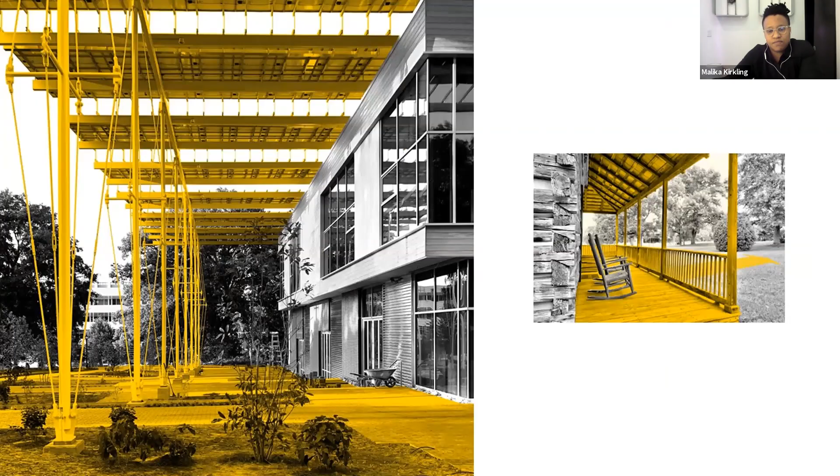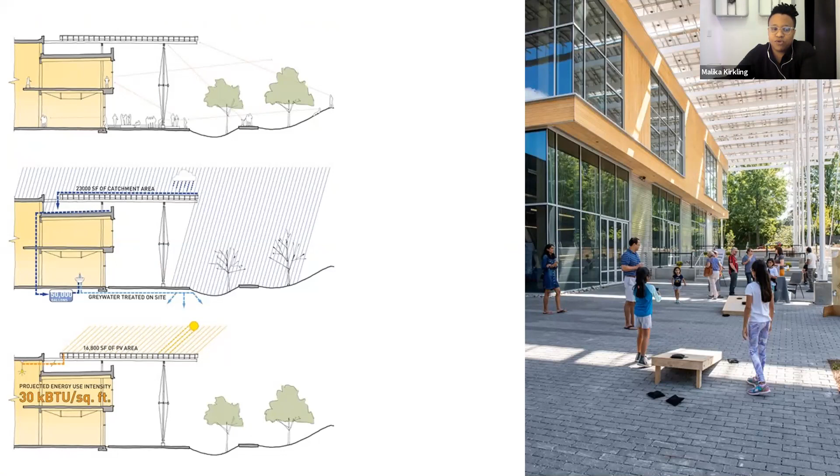It generates 455 megawatt hours per year, collects 50,000 gallons of rainwater, and is a cool place of prospect and refuge for the community. It is essential to the overall project's ability to do what founder Diana Blank calls real good rather than just less harm.

Defined by site, the proximity and program of the architecture, and the sheer capacity of the canopy, the PV arrays of our sustainable projects are a big self-conscious deal. The array is not going away.

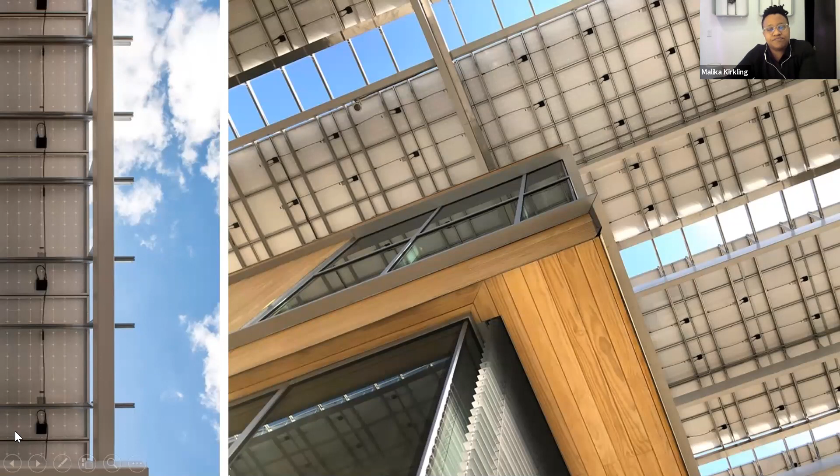Looking back now towards Seattle and Bullitt from Loom House, I'll end on Wright's own expectations. As for the future, the work shall grow more truly simple, more expressive with fewer lines, fewer forms, more articulate with less labor, more plastic, more fluent, although more coherent, more organic.

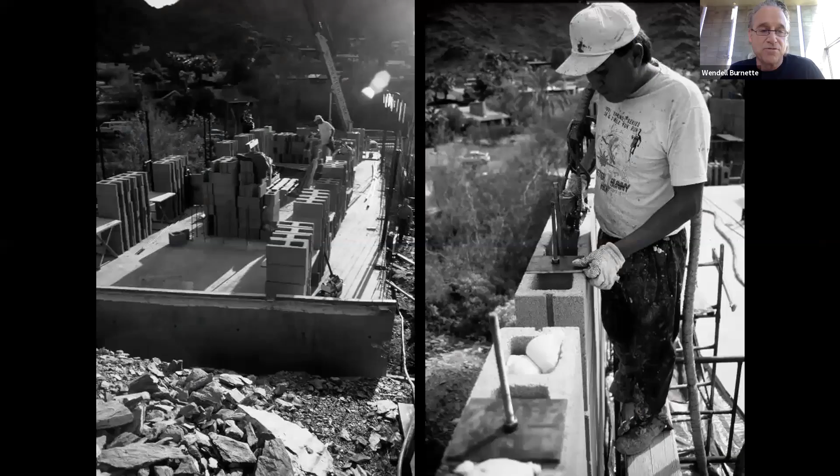You'll notice there are no end cells, so it's a skeletal frame of face shells that are post-tensioned with only a two-thirds height middle cell that achieves the compression, pumped with foam, achieving an R20 wall. So it's a single stroke solution: structure, thermal envelope, exterior, interior finish.

I was building this at the same time that I was finishing this work with my mentor, Will Bruder, where I served as co-designer, project, and field architect. This building is shaded from the east and west sun, open to the north and south, and to the traffic up and down the main street of the city.

This is a project that I started my practice with, the Dialogue House. It's a dialogue between two elemental volumes, the living room on the left, and just out of the image on the right, you descend into a pool. So it's an idea of resort living.

You put a towel over your shoulder and you go for a swim. Again, masonry construction, and then conventional wood frame stucco, finished with a plaster that creates a dialogue with the desert varnish of the Phoenix Mountains behind.

And the public project that I did with Gould Evans, which is in a public park on the west side of Phoenix. It's a multi-generational community center on the left and a public library on the right. This is, I think, a response to environmental design by looking at the assets of the existing site, which we always do, but was very important in this project.

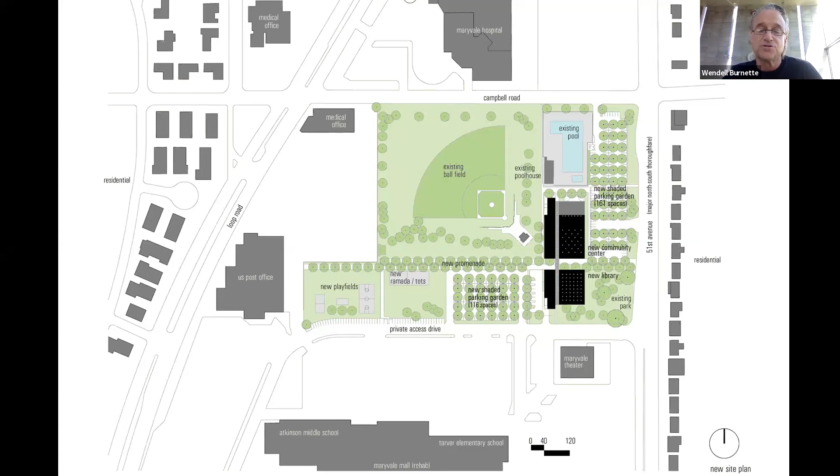In this case, a ball field and a park that was supposed to be paved. So the first act was to go for a parking variance and to reduce the parking from 600 plus cars to 250 cars, associating the library with the corner park, a community center with the field and the pool.

It's a reverse lantern that gauges one of the phenomenal aspects of our place, which is the range of light, the colored air. So mill finish stainless steel, 40% less energy to produce, the rawest form of the material, big box construction that promotes a dialogue between the exercise of the body, in the case of the community center, and the exercise of the mind in the library.

This is the busiest community center and the busiest branch library in the city of Phoenix Parks and Library System.

Another project is the Field House, which is south-facing on a cornfield in upstate Wisconsin. It's actually in what's called the Grand Chute. It's one of the last retreating glaciers in North America that created the thumb of Wisconsin.

And so it's this kind of glacial light form that is set against the existing fence row, protecting from the northwest winter winds that are very cold in this region, and opens to the south, but also a little warm light pumping out of the east.

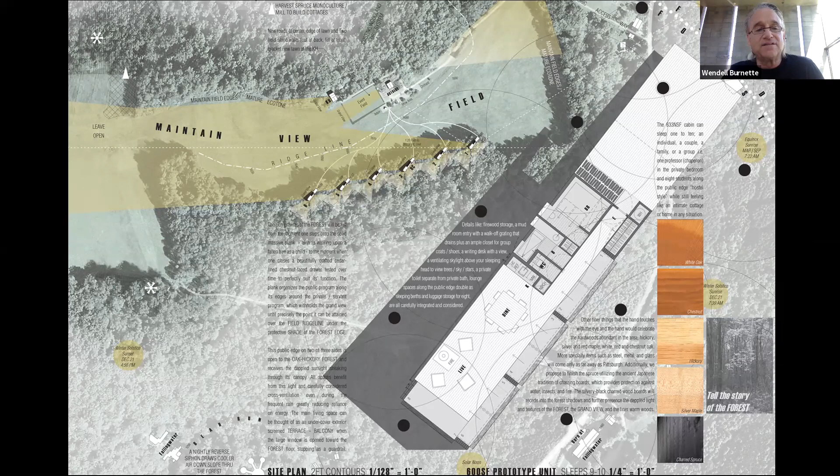This is our proposal that we were honored to be invited as part of the Fallingwater Cottages competition that Bill presented earlier. Our concept was looking at the Western Pennsylvania Conservancy's goal of getting rid of the monoculture of spruce.

And so our idea was to fell that monoculture, allow them to grow the forest back that's more native, and use that as an industry with the mills along Mill Run to do a solid timber construction. Again, single stroke solution: structure, thermal envelope, exterior, interior finish.

Another project in the desert. This on the left you see is a project you can barely find. It's receding into the floor of the desert. And then you discover the delicacy of the Sonoran Desert, the lushest desert in the world, by entering through this vessel.

This kind of form that's cracked open corrals a piece of the Arizona sky, preserves these volcanic rocks in the middle, and endows a courtyard space, a mesquite bosque that shades the glass during the summer and drops its leaves in the winter.

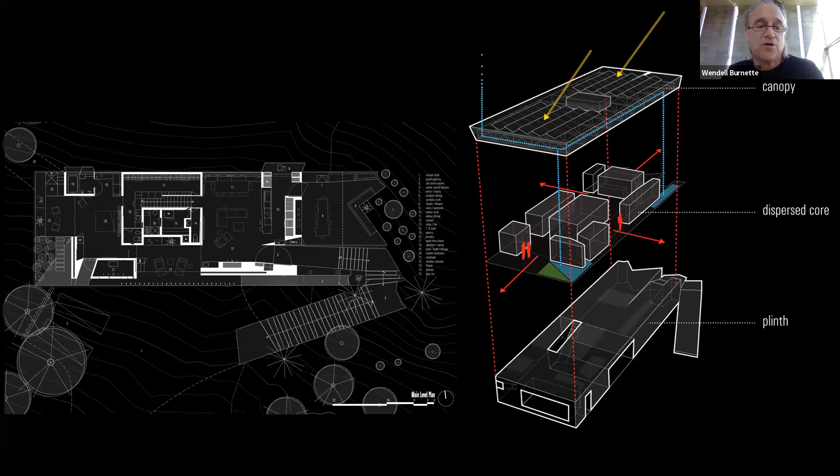So for us, it's about experience. In this house, the Hidden Valley Desert House, we have a dispersed core plan sitting on a plinth. The dispersed core reduces the glass to mass ratio to 30%, and at the same time creates a kind of pinwheeled views to the landscape.

Also, the canopy that sits on top of that dispersed core incorporates photovoltaics for a net zero house. It also shades not only the interior space, but a fully programmed exterior space equal in square footage. So indoor, outdoor living - most times the windows are open.

And the last project, the Amangiri Resort, which recedes into its landscape as a mass ruin, akin to the canyon landscape that we're designing. Cast-in-place concrete that utilizes local fines, aggregates, recycled fly ash from the nearby power plant.

And lastly, just to talk about the body - that sustainability, in my view, is first and foremost good design that touches the hearts and souls of the people, community, and places that it serves. Direct experience of places continues to bring delight to our hearts and souls, and teaches us that time is on the side of good building and good placemaking.